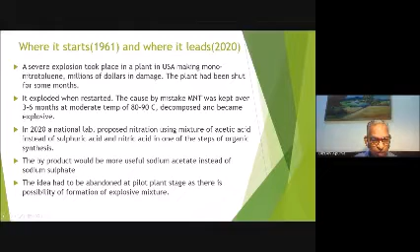Coming to 2020, a national lab - this is again part of a consultancy job - proposed nitration using a mixture of acetic acid instead of sulfuric acid and nitric acid. The main reason was that instead of sodium sulfate, you will get sodium acetate, which is a more valuable product.

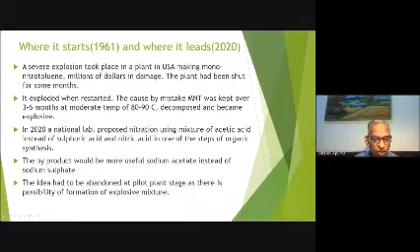When I investigated, I said there's a stage where explosion may take place, and therefore the idea was dropped.

So now, what is the long term? What is the knowledge gained? How many years have gone through this - 40 plus 20, 60 years. Due to this, keep in mind that there is an inherent instability of nitro compounds.

Ammonium nitrate is another thing - a very common fertilizer. When mixed with any hydrocarbon - it may be lubricating oil, diesel, anything - it becomes shock sensitive and explosive.

This was not known 60, 70, 80 years back. The harbor of Galveston was blown up, including the city of Galveston. And a plant belonging to BASF, the entire plant of about 10 square kilometers, was blown up in Germany in the 1920s. They didn't realize the reason was that hydrocarbon with ammonium nitrate is an explosive. Today it is used as an explosive, but in a safe manner.

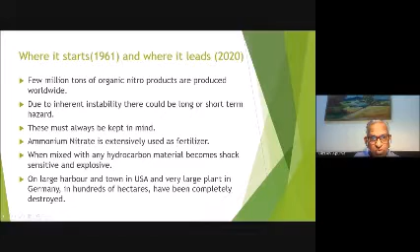So this is where a small knowledge can lead you. Now the question came - I have finished my PhD, what do I do? So I looked at strontium nitrate.

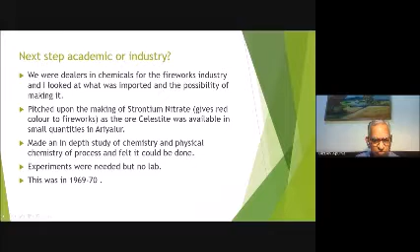There was no other manufacturer of strontium nitrate in India. It gives red color to fireworks. I came to know that the ore was available in Ariyalur in small quantities. I went back to my library and to my physical chemistry and went through the process. There was no lab - I did not have a lab in my house. This was back in 1969-70. I got some small amount of money from my father and used the kitchen as a laboratory and did the process.

The quality was better. We gave it to some outside testing and the quality was confirmed better. A small scale industry was set up and it was later expanded.

I realized this strategic importance when in 1971, during the war, imports were cut off. It is a necessary ingredient in tracer bullets.

Because of the very small size of my production, we produced every day 50 kgs per day to military specifications and sent it per day by a personal courier who would take it all the way from Chennai to Aruvankadu.

Later on, of course, we went into bigger things like a nitric acid plant and sodium nitrate plant, all set up at Ambattur without any foreign collaboration or imported equipment. It was all done by us. It was a great learning experience.

All this without seeing an existing nitric acid plant and without knowing what automation was. This is a 73-74 plant. This is the control panel for the plant.

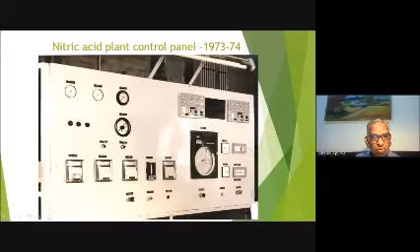What things did we learn during this time? Again, I come back to the point that we have to keep on learning things and doing things. I had taught a semester course on materials of construction at AC College, so I knew about the metallurgy of steel and the mechanism of corrosion.

I had learned during this nitric acid business that if ammonia is a feed for nitric acid, it must contain 2% water to avoid stress corrosion cracking of steel.

I also learned that one evaporator was completely cracked up from boiling nitrate solutions. If it is cold, nothing happens, but if it is a boiling nitric acid solution, ordinary steel will crack up in a few months' time. So this was another lesson to be learned.

Another peculiar thing about nitric acid I learned was, even in a heat exchanger, the nitric acid is on one side of the pipe and the water is on the other side, yet it gets corroded if it contains chloride. These are the things you keep on learning when you go into any field.

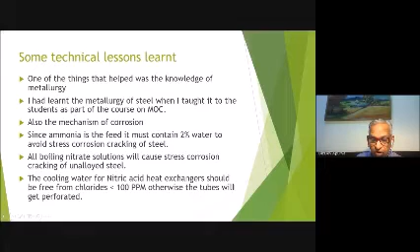However, I must come to one thing, that we had to give up the entire thing. At some point I had to give it up. Making a comment here, it was not easy to set up an industry and run it.

There is no ease of business. Even today, there is no ease of business. Corruption and political influence is ever present, as it always has been. There is no change. This is my 60 years in the industry.

So I gave it up, the whole thing for good. I sold my company, sold the company and all that, and became a consultant.

Now, when I became a consultant, my idea was that I should do innovative work. I would not simply do what somebody says, like a drawing of some exchanger or making something. I was not interested in that.

But if you are starting with innovation, you must realize that as a student or as staff in any institution or factory, you are the generator of an idea, but somebody has to help you and somebody has to promote the whole thing. And it's not easy.

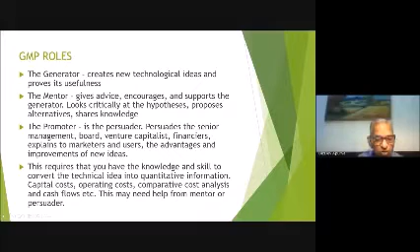Now this is real - if you are doing any innovative work in your life, this will be a very useful lesson. I'll give you a few case studies. There's a column I'll come to later, called a high gravity packed absorption-desorption column, invented by Professor Ramshaw of ICI. He was in ICI and then became University of Newcastle. He did not get much encouragement in ICI.

For 20 years, nobody bothered about the idea. Then Professor Gardner of Case Western University went for a year to the University of Beijing. He had to do something there, so he took a model with him. The Chinese took it up and made a model, resolving certain mechanical issues.

The first application was to deoxygenate water - apply vacuum through the system and remove dissolved oxygen down to 100 ppm or less, achieving 95-98% removal.

Now earlier this was being done with a 30-meter high column, 1 or 2 meters diameter, applying vacuum and so on. The high-G machine is only 1 meter in diameter. This is the beginning of an entirely new set of operating procedures - you could call it a new type of unit operations - but this is what was happening.

Deoxygenation is absolutely necessary when doing oil well explorations and for boiler feed water in power plants. So you can imagine the amount of time and discouragement involved before this technology was adopted.

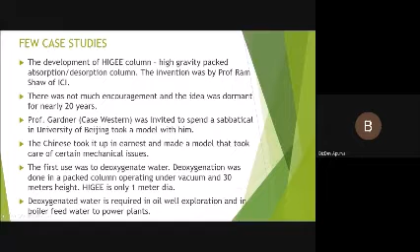Another case where you get into trouble involves two big companies. Nitric acid is concentrated from 62% to 98%. If you read your books, they say add sulfuric acid and distill it to get nitric acid. But practically, the dilute sulfuric acid then needs to be reconcentrated - a very troublesome and expensive process involving heating.

Another idea came to DuPont. They said, why not add potassium nitrate or sodium nitrate and use this salting-out effect to concentrate the acid? They tried a few nitrates and then left it at that.

But another company, Hercules, in the same town, used magnesium nitrate and was successful in concentrating the acid. The dilute acid's magnesium nitrate is reconcentrated and reused. The process was developed at the same time by ICI.

Now, this story - you might have heard of the Chilton-Colburn equation - this story has been narrated by Chilton himself.

I'll give you an example not from chemical engineering, but from Xerox. Sometimes you have an idea which is very good, but not implementable because of various reasons. Xerox was patented, very good, but commercially was not successful initially as the ink was not good - within a month or two the ink would fade out. It took almost 9 years, about half of the patent life, to develop a reliable ink.

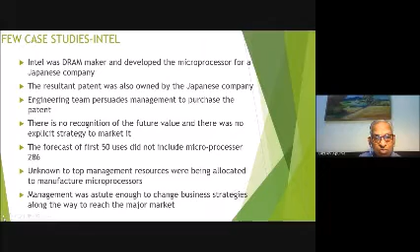I have done the same thing, this is my case. We made a pilot plant for recovering carbon disulfide from waste gases. We gave a technology demonstration to the company, one big group. After spending something like 15 to 20 lakhs, there was no answer, nothing. The management had changed, we had no information, no contacts. After a few years, somebody gave a call and said, I have seen those results, we are interested. Please give the pilot plant demonstration again. We did it again, and then we got the consultancy work.

This pilot plant was only 60 cubic meters, but the main plant was 45,000 cubic meters per hour. This is where our knowledge came in - the knowledge we gained in our college, the knowledge we gained from books, the knowledge we gained from our experience. This included operator training, startup, and operating manuals.

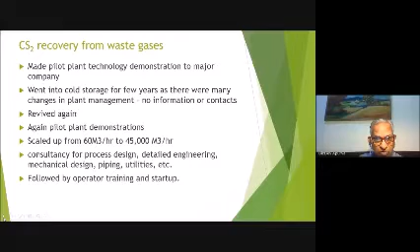You will see in the next slide, this is the plant. One tower is 3 meters diameter and 35 meters height. The other tower is 1.8 meters, 45 meters height, entirely designed by us - mechanical, process design, piping, everything was done by us. But then there's a gap of a few years between our idea and getting the thing into hardware.

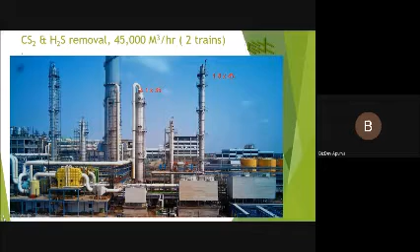I'll tell you the other thing, we spoke in the introduction about azadirachtin. The same idea happened with a company - somebody said, sir, it's a good idea, neem is available in India, we should do it. The company purchased the German patent. The patent described a few grams of seed crushed and extracted with a mixed solvent, and it was found that AZ had a long shelf life and all that. The pilot plant was constructed and they extracted it, getting small quantities of products which were tested.

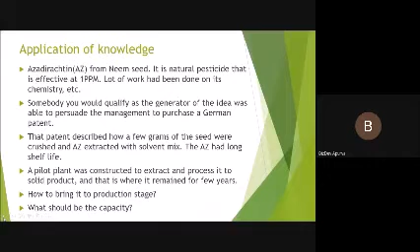But then how to go to the next stage? How to bring it to production, and what should be the capacity, etc. That problem was referred to us because for 3 or 4 years they were only doing pilot plant, but didn't know how to progress to the next stage of commercialization. When it came to me, there was no precedent, nothing to copy from - absolutely nothing. This would be the first plant in the world. That is where the application of knowledge comes in.

We asked the right questions, we found out the answers, a few experiments were done mostly, and so we learned how to preserve the neem seed. Neem may be very good for medicines, medical use, but neem catches fungus, and once it catches fungus, it gets aflatoxins and becomes a poison to human beings. There were so many other questions to be found out. Anyway, we started with 30 tons and ended up with 90 kgs.

We had to do the entire design - if you are going to design, you have to tell the company, look here, you want 100 kilowatts of power, you want so much cooling water, so much refrigeration, all that had to be done, and all that was done. So again, this is a case of knowledge and application of knowledge. The plant is operational, I think for more than 10, 15 years, and cost about 18 crores.

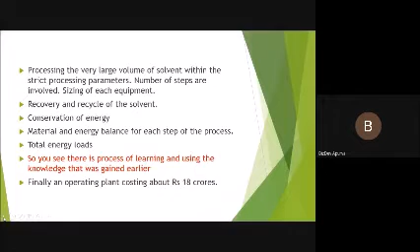Now, when you come to this, that's one thing. The other part is conceptualizing - somebody gives you an idea, can we do this, do that, then you have to come back with some ideas, come back with the whole thing. This came to us through a British consultant, actually we were not the main consultant, it was a British consultant.

He wanted help with Lake Qarun, about 80 kilometers south of Cairo, which is becoming salty year by year. So they asked how to prevent it - if the entire lake becomes salt, like sea salt at 3%, then the whole area becomes dead. It's agriculture area, the entire agriculture area will go dead. So one suggestion came that we should recover all the salts from the lake, and the question was how much do you recover, what is the salt balance, how do you do it, and all those things. So this was all done.

Again, there was a learning process. Where do the salts come from? Where do they go? How much is the rate of evaporation? What is the rate of evaporation? This was all a new learning process for me.

What are the quantitative equations that take into account all these parameters that go into finding the base? The base was how much salt needs to be removed per year, and what are the salts to be removed per year.

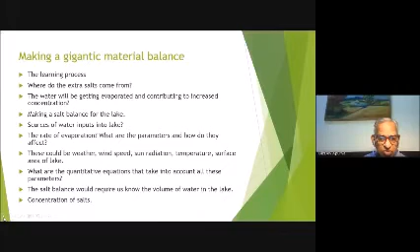You could get a lot of information, and if you want to know how much evaporation, then what is the surface area of the lake? That's from where the evaporation will take place.

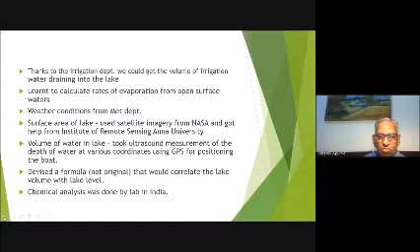So that time we used a satellite image of the lake from NASA and got the help of the Institute of Remote Sensing in Anna University to give us the calculation of the total surface area of the lake, from which the water will be evaporating. Again, the question of what is the volume of the lake, because you have to make a material balance for the lake. So we developed all those things.

And then we came to the chemical analysis, which was done by a laboratory in India with the help of the Central Salt Research Institute. And then we found the area of the lake was so much. This is the volume of the lake, 1,000 million cubic meters.

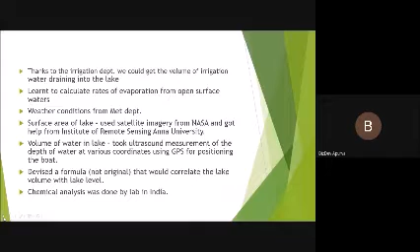The quantity of salts is there, and what are the salts? There's already a plant recovering some sodium sulfate and sodium chloride, and the remaining salts are so much. So this new plant will have to be designed for this. Now, this is what we have to recover every year to keep the salt balance.

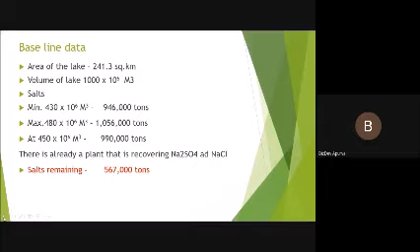So next was, how do you go about it? Recovering all these materials, you have to boil, you have to evaporate and all that, but then it's going to be costly.

So we learned that if you have cogeneration of power, usually ordinary power plants, what we have in Ennore or Tuticorin or any place, have got 33% efficiency. Whereas if you generate steam and power and use steam and power in any ratio, then the thermal efficiency of the whole plant goes up beyond 84%. And that brings down the cost of the power and steam also.

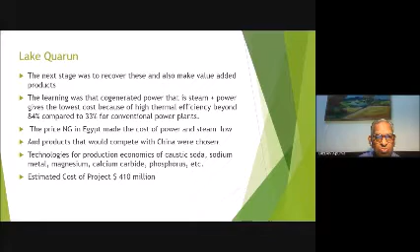So with this idea, a lot of work had to be done. Again, first time, no precedents. We even estimated the cost of the project at 410 million, and that is a big exercise to be done.

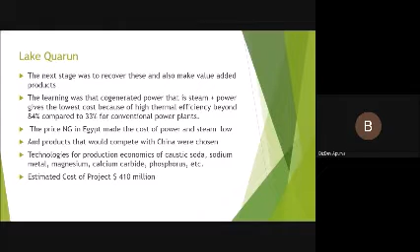Now this is something which I had to imagine and do. The report was accepted by the Egyptian government. So far, partly it has been done.

See, this is a conceptualization of this one. Now we come to another part, which is what are the advances that have taken place in the field of chemical engineering, and specifically I will refer to something called process intensification.

This is the application of conventional chemical engineering knowledge—our knowledge of heat transfer, mass transfer, turbulence, and all those things—but used in an unconventional manner. Not in the normal way, but look here: if it's a viscous liquid, there's a boundary layer. That boundary layer must be broken up and disturbed to improve the heat transfer. Similar situations will come up. You have to use this knowledge in an unconventional manner.

This phrase was coined by Professor Ramshaw at Newcastle University. The aim of this whole strategy is to optimize capital—that means minimum capital for maximum production, energy, environment, and safety, by reducing the size of the plant. In other words, by definition, a chemical engineering development that leads to a substantially smaller, cleaner, and more energy efficient technology is process intensification. There are courses run in other universities on process intensification.

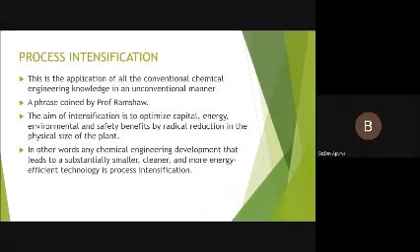It is not possible to give you the entire field of it, but I'll give you some flavor of it. So we start.

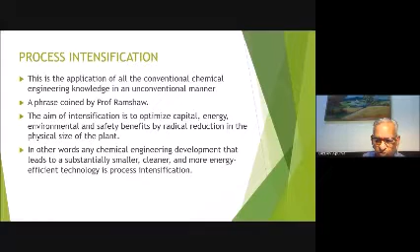First, you look at why the process is slow, why can't we make it faster? That is a fundamental question to be asked.

We may have to invent hardware that overcomes these constraints, and there are new methodologies. For example, compact heat exchangers, structured packed columns, static mixers, HIGEE, spinning disks - a huge number of equipments have been invented. Microchannel reactors and all those things have been invented to make processes faster, cleaner, with better conversions.

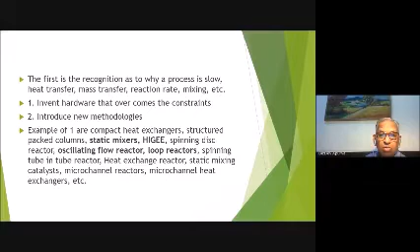The other area is methodology - reactive distillation, reactive extraction, membrane separations, various other types of things are done, and use of microwave or centrifugal fields or supercritical fluids. The other is moving from batch to continuous reactor systems, using the same kinetic data which you develop in the laboratory and moving into this idea of process intensification.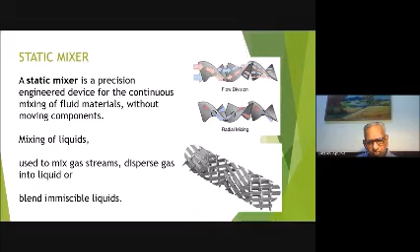This is another idea where you do the reaction while adding materials at the same time. So the mixing takes place, the reaction takes place where the mixing is there. You can add one stream here, you can add the other stream here, the main stream can be added here, and all sorts of combinations are available to you depending on the kinetics.

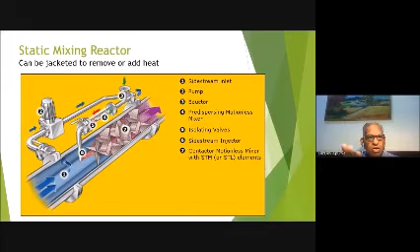Here is the case - if you have seen any effluent treatment plant, the effluents may come from different parts and are brought into a single tank where there is a huge mixer with a motor. You mix everything so it becomes uniform, then it goes into the treatment area. Whereas if you use the static mixer, there's no need for a motor - it's just mixing in the channel itself, mixing takes place.

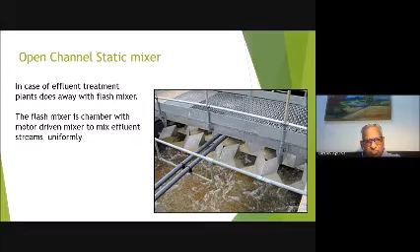You must be knowing about plate heat exchangers. I have used extensively plate exchangers to save space. One of the things is, what is the difference you can approach the two streams - they can be less than 5 degrees centigrade apart, with much lower internal volume. Earlier models were all liquid, now they are liquid plus vapor also. Cost-wise, the plate is much cheaper than the shell and tube heat exchanger.

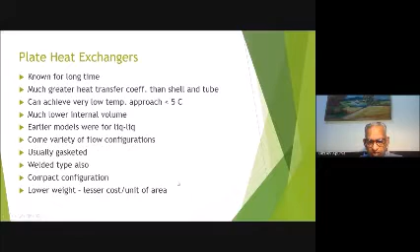This is a totally new concept - printed circuit heat exchangers. On the plate itself, you etch the channels through which the liquid will pass. One liquid goes like this, the other liquid goes like this. These channels are etched into the plate, and the plates are put together by diffusion bonding - by pressing and heating, the plates are joined together. This becomes a very high efficiency heat exchanger, about 20 times better than shell and tube.

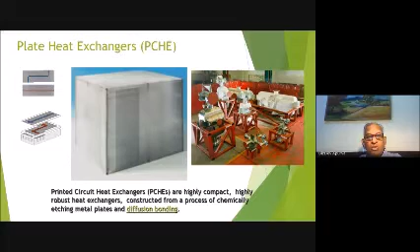In fact, this can be used as a reactor. It has been used for small scale methanol reforming to hydrogen - you take methanol and crack it up, so you get hydrogen, and this has been used as a reactor.

Then offshore platforms where very large volumes of heat have to be taken out - this is an example which saves that per platform. If you use this PHE, you can save $30 million.

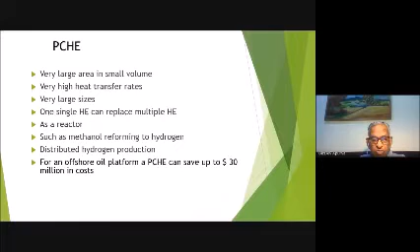This is an example of an oscillating reactor - a long tube like this with baffles, and you have oscillations. This is very interesting - it has been invented at the University of Newcastle and gives very good results for certain types of reactions.

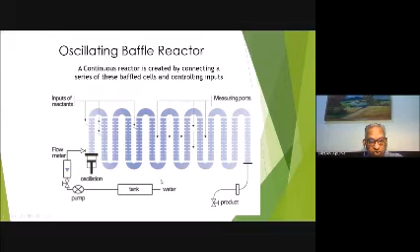This is a case of a high-speed mixer. If you have gone to some industry, you will notice ribbon blenders - almost everybody uses ribbon blenders. Now this has got some paddles and it is very high speed. The result is, if you take a batch of 500 kgs or 250 kgs, the mixing time is only 5 minutes. This is being manufactured in India also, and basically those people who are making snacks are using it.

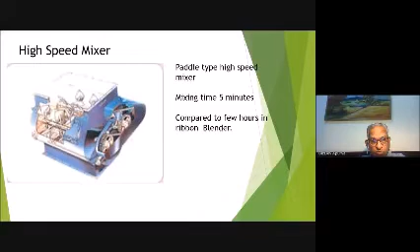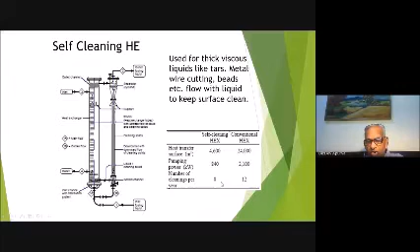In India, the major development has been at the university, at IIT Kanpur, by Professor Rao. Here you have a rotating packed bed. So you have a liquid feed, a liquid outlet, a vapor inlet from this rotating unit, it mixes here, and then it comes out. This is a supporting disc, the disc on which the packed bed is put. The packed bed is actually a very fine mesh, not the usual packed bed you think of with packings. The result is that the small units will have as much as 30, 40, 50, 60 theoretical trays.

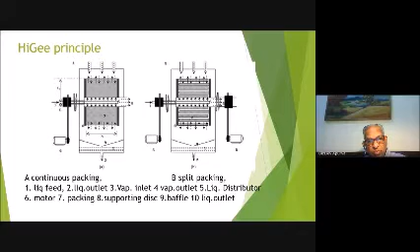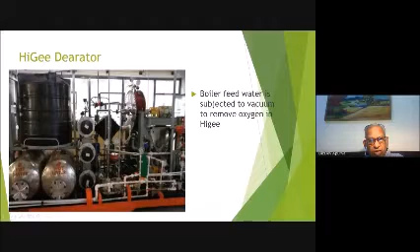Here I was speaking of the deaerator. So here is a photograph of a deaerator made in India. This is your actual deaerator. The rest is all the equipment for putting in and taking out. This is done in India. This is again a plant which has been put up in HPCL Vizag. This replaces a tower of 1.8 meter diameter and 20 meters height.

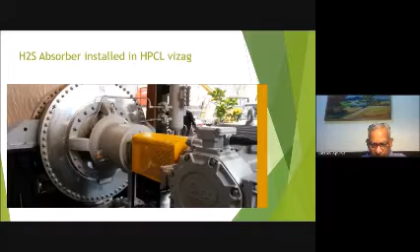Again, the same idea in a small way for CO2 absorption in ethanolamine solutions. That means it replaces a tower which is about 18 meters in height.

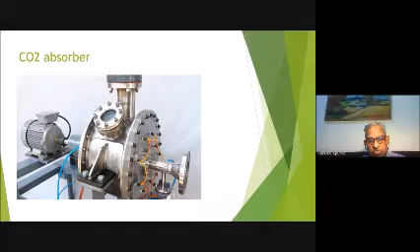Reactions can be done in this HiGee also, and other things in various types of reactors, very fast. Before I come to this HiGee reactor, the contact times are so low that you can make calcium carbonate, precipitated calcium carbonate, in nano size. The same thing can be done. In fact, the Chinese have adopted this in a big way, and we are importing this nano calcium carbonate from China. Although we have the technology, we are not producing this nano calcium carbonate.

Here, when you have the reactions, what has happened with this intensification? The reaction rate goes up by 60 to 260 times. In esterification, water has to be removed. If you remove the water, the reaction rate is 260 times. If you do not remove the water, it is 60 times the normal reaction rate you would find in ordinary batch reactors.

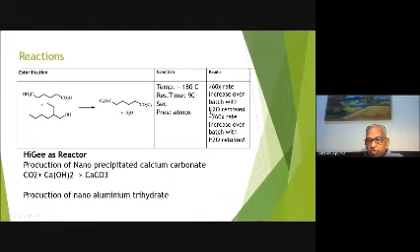This is a selection showing how the type of reactors change. This is a micro reactor, I'll show you some photographs. A huge number of reactions have been done using these micro reactors, which will take about 1 to 2 liters per hour of flow. They have a heat exchanger, everything is inside. Very, very efficient, and the benefits of high conversions are there.

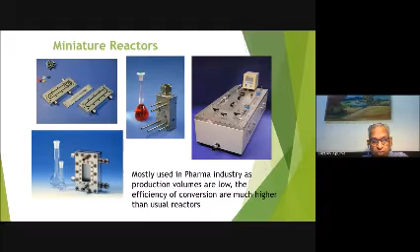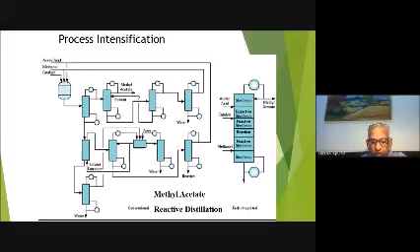So, reactive distillation is another area of process intensification. One example you might have heard of is methyl acetate. The idea of methyl acetate was this: when you make methyl acetate, you'll see in the next slide there are something like 8 or 9 columns, but now it has been replaced by a single column. The reason is that if you recognize that in a tray, each tray has become a reactor, because there's a stagnant liquid layer in it. Once you recognize that, it becomes easy to design. So you've got multiple reactors in one distillation column, and the distillation column is still a single column. I have seen this also with ethyl acetate, but here the idea is that when you make ethyl acetate, you require sulfuric acid or sulfonic acid as a catalyst, whereas this uses ion exchange, acidic ion exchange resins as a catalyst. The catalyst itself is circulated in the bottom section of the column. What it does is save about 40% energy.

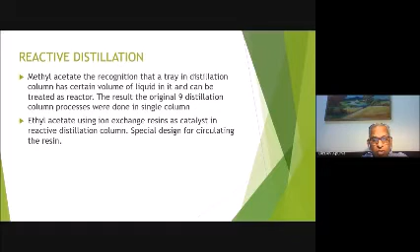This is what we did a long time back. We were doing thionyl chloride chlorination of some compound, a very common reaction in organic chemistry. We carried out the reactions in a 5-liter flask and found out the rates and so on. But then, since a plant was already operating, what we did was we designed a loop reactor.

We designed a loop reactor. The reason for designing that loop reactor was that we could increase productivity. So we designed a small loop reactor. First a batch reaction was done, and from that kinetic data, we could design the loop reactor. When we designed the loop reactor, the productivity per reactor volume was 340 kg per hour per cubic meter of reactor volume, whereas the batch reactor was only 10 kg per hour per cubic meter.

In fact, for getting the same production, the existing plant was using 3 reactors of 6 cubic meters each. Now this could be reduced to a single reactor of 0.5 cubic meter, a volume reduction of nearly 36 times. This is the benefit of this intensification. I think there may not be sufficient time to go for more of this, so now I come to another subject: what are the new frontiers?

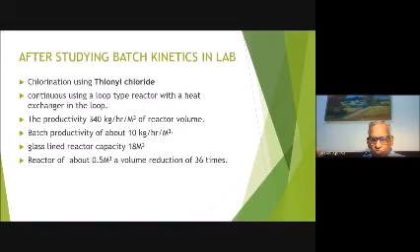Anyway, the point is you have two substances: a high melting point substance, choline chloride, discovered by Professor Abbott and his students, with melting point 302 degrees, and urea with melting point 133 degrees. When mixed in a ratio of 1:2, the melting point is only 12 degrees centigrade, meaning it's a liquid at normal temperature.

The question at that time was, what do we do with this? Choline chloride is produced in very large quantities, so no fear about its supply, and urea is of course produced in millions of tons as fertilizer. Now, what is the use of this?

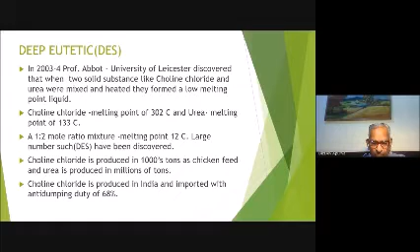So much work has been done on this that 3 types of deep eutectics are recognized, and you can see these eutectics have a melting point ranging from 60 degrees centigrade to minus 30 degrees centigrade. So if you have choline chloride, you can combine it with oxalic acid, malonic acid, ethylene glycol, glycerol, fructose, and others, and these combinations have certain uses. The uses have to be developed. In fact, it's an open field now for any research to be done, and a lot of research is being done on this subject, exploring where it can be used.

Now, these are ionic liquids, meaning ions can pass from one side to another. So they have been used as an electrochemical fluid for chromium plating, silver plating, and electropolishing. Electropolishing is something - suppose you have a stainless steel vessel, even your own household vessels, it has to be buffed and finished. No, it's not necessary. Just dip it into this thing, and it gets a bright polish in a few minutes' time. And then you are not using any acidic baths - no sulfuric acid, chromium sulfate, chromium dichromate, and all those things. It is all replaced by this.

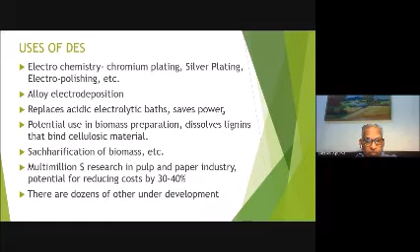The other thing is now we are talking of solar power and wind energy. What happens is when you talk of solar power and wind energy, how do you store it during the non-production time? Solar is in daytime, wind is only when wind comes. So the system will use batteries. Now, if I use batteries, lead acid batteries, lithium-ion batteries and all those things, very, very expensive stuff. The cost is very high, and there's a life. The battery has to be thrown away one day or other, after some 10 years or something.

Now, what has happened is a new type of battery has arrived where there's a liquid flow in the electrolyte. So when the electrolyte is a liquid, you have two electrolytes, one on the cathode side and one on the anode side. So this circulating liquid is what catches the power and keeps it.

I'll come to the next slide. So what happens is, you have got the negolyte, which is electrolytic, and you have got the posilyte. So this contains the charge. So what is required is big tanks containing the charged liquids. When you pump the two together through an electrode, bipolar or semi-permeable membranes and all that, then power is generated.

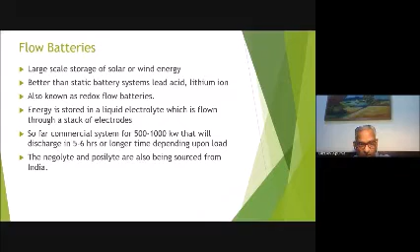Now commercial systems are available for 500 to 1000 kilowatts so far, and that will take discharge in 5 to 6 hours. So in 5 to 6 hours you can store 500 to 1000 kilowatts in liquid. Now the question is, how much liquid can you have? Any quantity of liquid you can have, 100 cubic meters, 10 cubic meters or 20 cubic meters, and you can store any amount.

Now this has become one of the major ideas that has come in along with this. Why I came into this picture was the manufacture of the negolyte and posilyte is being done in India, partly. Now foreign companies are actively sourcing this negative electrolyte and positive electrolyte from India. That is how I came into the picture. I think that gives you an idea where we are leading to.

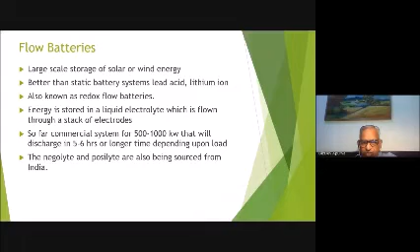There are so many other things. I think we've taken enough time, but it's not the end of the thing. Today, even an old packed column, how many varieties of packings are there? And there is still scope for making new types of packings that are easy to fabricate, cheaper to make, and give you the same or better results than what are available from the present set of packings, whether it is Sulzer or any other company.

I think with that, I've spent enough time on it. Now more than enough. Now coming to the end point, why are these things we talked about, called intensification and all those things, not being adopted?

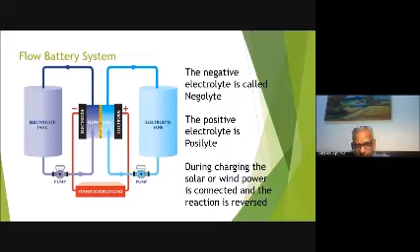One is people are not aware of the concept. Another is all these new, mechanically new processes we are not used to. And people who have spent 10, 20, or 30 years in the chemical industry are very doubtful whether this will work or not. It will be a waste of investment, and all that.

So now this is the issue, and I hope with what I have done and said so far, new ideas will come, and then there will be many changes that will come through. I think with this I will end the thing and come to the point of questions.

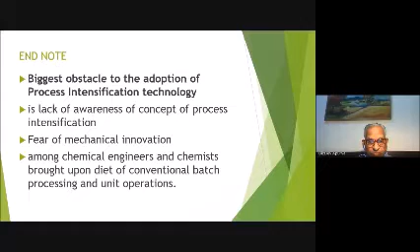Sir, there are a few questions in the chat box. May I have the privilege of reading them out, or would you prefer to do it yourself, sir? One second, I am not very familiar with all this business. Okay, one second. Yes sir, no you can read it out. One second, okay sir, one minute, I've got my...